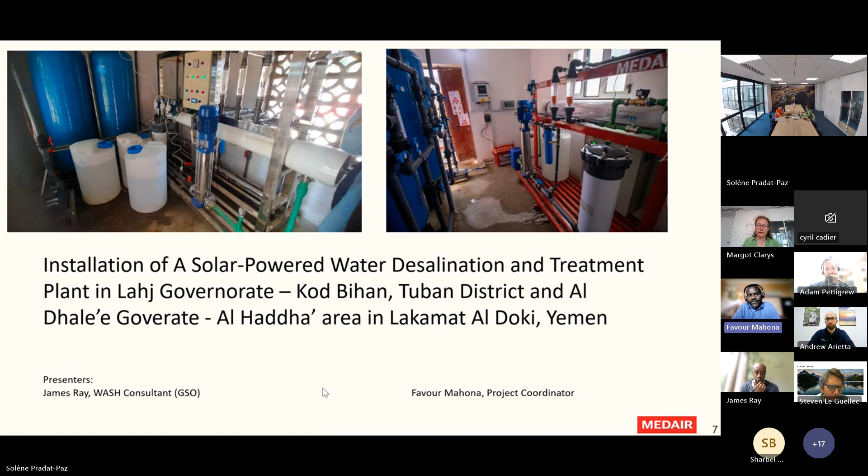So in Yemen, we actually did construct 2 desalination units. One, we did it in one governorate, which is close to Aden, which is Lahj. That is an area called Kod Bihan. And then another one, we did it in Al Dhale'e. And that's why you can see the 2 pictures. The first one on your left, that happens to be the one in Kod Bihan, and the one on your right would be in Al Dhale'e. Next slide.

Yeah, so among the technical things, just to give us a little background, what made us actually consider desalination was that we had a lot of high salts in the water that is available for the community to use, and considering the fact that we had lots of water sources, however they were not potable.

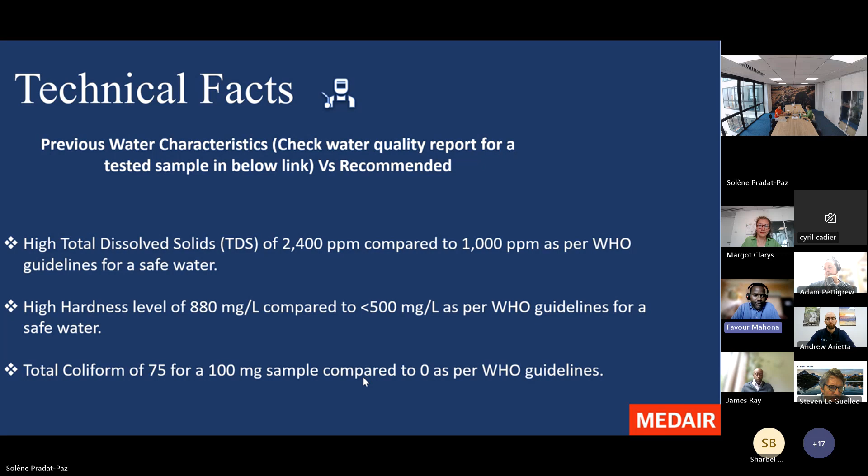And then largely before the war, we used to have piped water connecting the communities which are near the cities. But because of the destruction, people resorted to just finding shallow wells where there would be water, and then they would be able to access that water. So it was not very safe when it comes to humanitarian standards in terms of the total dissolved solids, the high water hardness, and the presence of coliform.

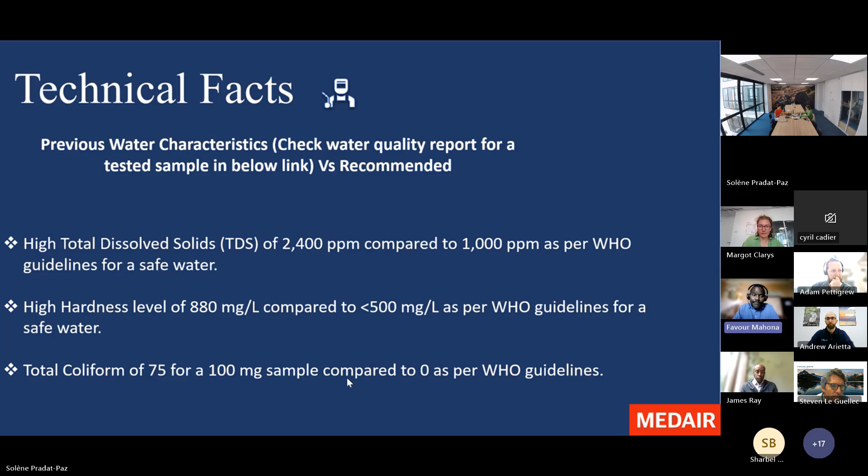So as a result, initially we would do a simple treatment method where we would try to source a well that would meet the standard, and then do a lot of construction and a lot of networking in terms of piping and all that. But that was going to be costly also in terms of sustainability.

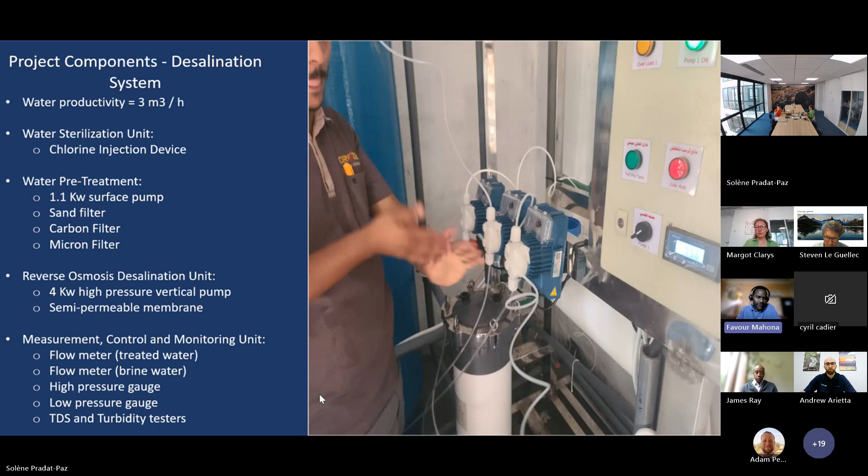Yeah, so why did we consider solar as an alternative energy to support desalination? Because we were looking at an energy mechanism that is available and also sustainable for the community. So solar came out to be the most probable successful one beyond the project, because alternatively, all their water points were always running on fuel, diesel or petrol run generators or pumps, and those were not sustainable, because when the community would not have the money to pay for it, the system would not function.

And we were thinking of making the desalination unit something that is sustainable even beyond our presence. We are now, I would say, about 9 months out of the country, but at least the units are still running. Kod has been functioning for the past 2 years. So at least we can use that as a success, that it's a plant that we were able to set up.

And among the things, maybe some of the differences that we're able to put between the one in Kod Bihan, which is in Lahj, and the one in Al Dhale'e, were the number of panels. In the beginning, we provided a reasonable number. We did not put so many of the panels, but then we realized later, because Al Dhale'e is a place where half of the year it actually rains, and then the other half is actually sunshine. But you come to Lahj, the better part of the year is actually sunny. So they have more sun presence, which then actually supports the solar energy.

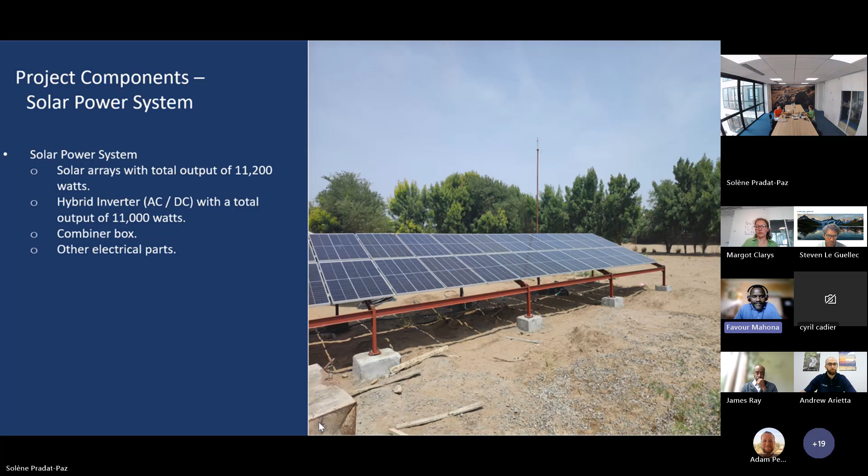And it's very easy. A lot of the community members were former retired engineers. So it was very easy to actually just do a brief induction, and then they'll be able to support the plant. Next slide. Yeah, you can skip that one. It's just something for information about the output.

Yeah, so I was just trying to think of something that maybe might be very good for us to consider. For example, the solution that we considered would actually be workable in a country like Yemen is the use of solar. So whether we are doing desalination, whether we are doing a water unit rehabilitation, we always considered solar energy, and that has worked, because most of our rehabilitated water points, either distribution of the water as well as the desalination, we worked with solar.

And what are some of the advantages that we have when we are using solar? For example, we have sustainability and availability. They have sunshine throughout the year, so that means they do not need to struggle to access the energy. And at the same time, the maintenance: once the system is functioning, all they have to do is clean the panels probably once a week, and then monitoring that the system is functioning.

And maybe a disadvantage would just be that we realized not all of them... Sorry. We realized that not many of their engineers would, for example, troubleshoot if there is a technical fault on the wiring. But how did we mitigate that? We had to pair the contractor who did the designing of these units together with the volunteers during the construction phase. Then they are taken through a refresher and orientation, and that supported us greatly. Next slide.

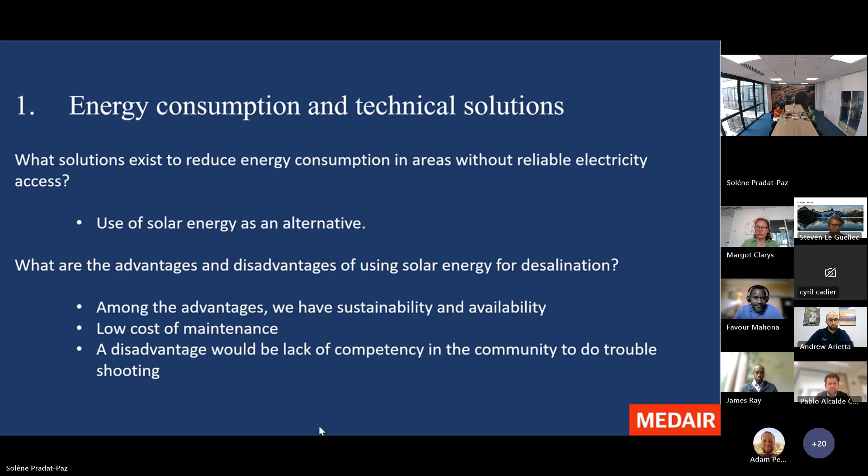Yeah, so I've mentioned the use of local expertise. One advantage we saw in Yemen is that in every family there was either a doctor or an engineer. So you'd always find in a village this one retired engineer who used to work in a factory or a plant. So these volunteers would offer themselves up to support. So we took them through training on how to operate the desalination unit in terms of changing the membranes, monitoring the gauges, and also servicing in case there is a fault on the electricals.

At the same time, we also connected them with contractors that had expertise in this. The two plants were designed by engineers in Yemen, and these engineers assembled everything from the beginning to the end. So we connected the local volunteers with the contractors to make maintenance easy, because there was a guarantee that we signed with them for 1 year beyond the project. So they would always come to do regular checks, maybe every 3 months, and during that time they're doing it together with the community.

And among the best practices we saw was that working with the retired engineers in the community provided a very good pool of personnel that could manage the unit, because the biggest challenge with a desalination plant is if you only import the engineer. Let's say we were working in the south of Yemen and you bring an engineer from Sana'a. Once he has constructed it and goes back to Sana'a, it means when there's a problem, that plant cannot be serviced.

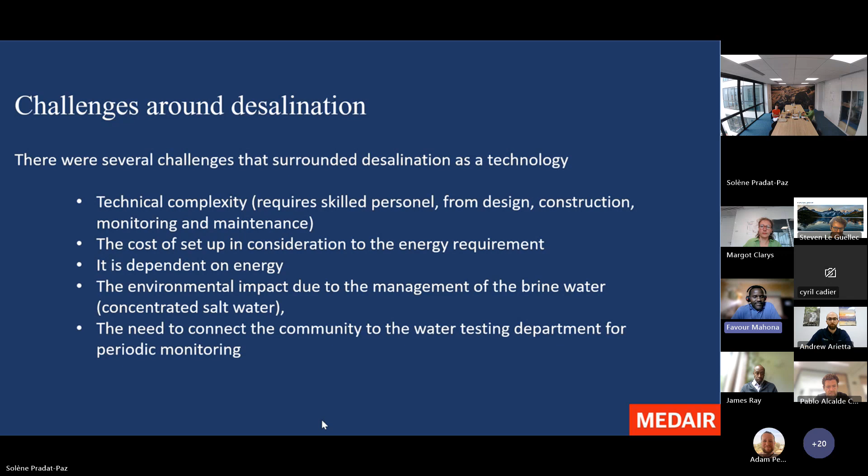On environmental impact, brine management was also a concern. What we did was make sure that for every bit of brine water, we had soakaway pits constructed away from the plant and away from where the population was living. And lastly, we connected them to the water department for regular testing of the water.

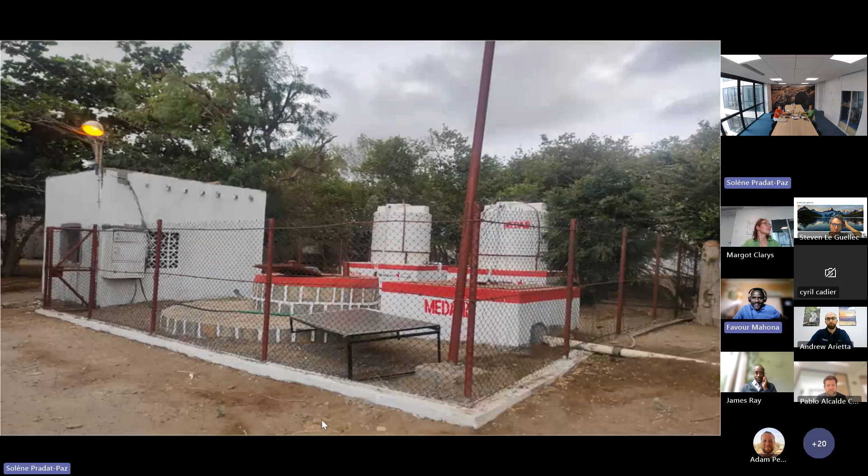Thank you. Thank you very much, Favour. You're welcome. James, do you have anything to add, or can we go ahead? No, I don't have anything to add. Thanks, Favour, you're amazing. You're welcome, thank you.

I remember back in January during the workshops there were lots of questions around the RO technique being necessary for it to function, since it needs so much energy. Even though we won't be able to lower the amount of energy it needs, how can we diversify the sources of energy so that we're not unable to put the technology in place if the source is no longer available? So hybridization was a big question in January—how we could use solar, but not only solar, because in certain places it's not possible, or at certain times of year we can't rely on it. So it's great to understand the different limitations and specific constraints in Yemen that you experienced.

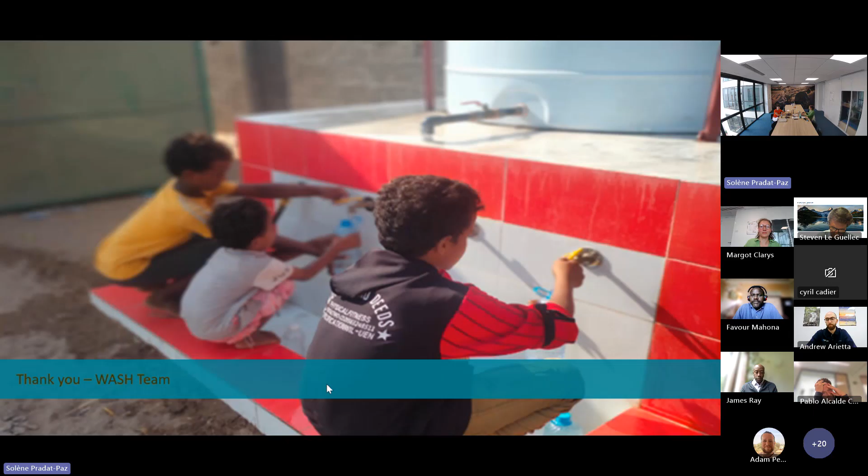I think that's a great transition for Maud to take the floor, and she will share with us the specificities of the Gaza context and how Solidarités could adapt the way they do desalination because of that context.

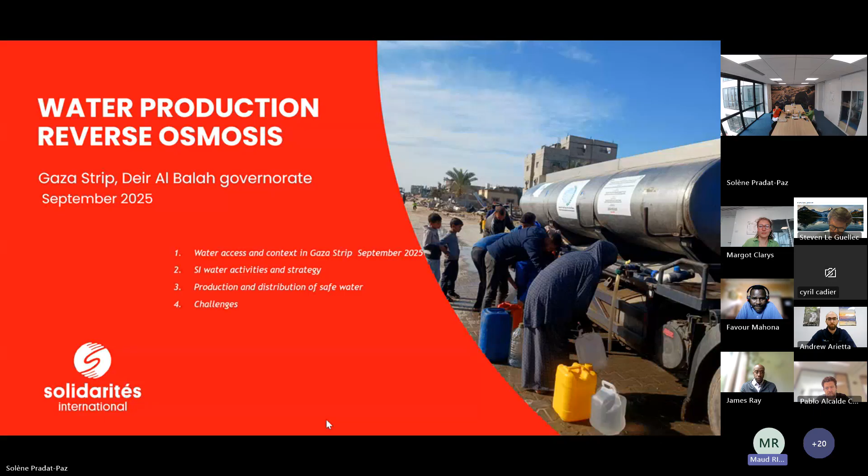Maud, thank you, up to you. Good afternoon, everyone. I will discuss with you water production through reverse osmosis in the Gaza Strip, mainly in an emergency context. Let's go.

I'll start with a bit of context, though I guess most of you already have an idea. Most of the population has been displaced multiple times, and since March 18th, there have been more or less 850,000 people displaced again. Also, as of last July, 96% of the population evaluated by the WASH cluster said they are facing moderate to high water insecurity, meaning they do not have access to water.

Water in Gaza means drinking and domestic—there are two kinds. This was already the case before the war: drinking water mainly for cooking and drinking, and more if possible, and domestic water for laundry, cleaning, showering, and so on.

Also, there was a big issue about water quality, mainly chlorination in Gaza. Last April, 85% of households were not consuming water with sufficient chlorine or FRC, so that gives you an idea.

Also consider that in Gaza there are a lot of what we call evacuation orders—you receive a message from the Israeli army saying this area has to evacuate. Following this, a lot of infrastructure becomes unreachable, or not safely reachable. There's a small table here, from September, showing the impact on WASH infrastructure in Gaza today—I won't go through it in detail.

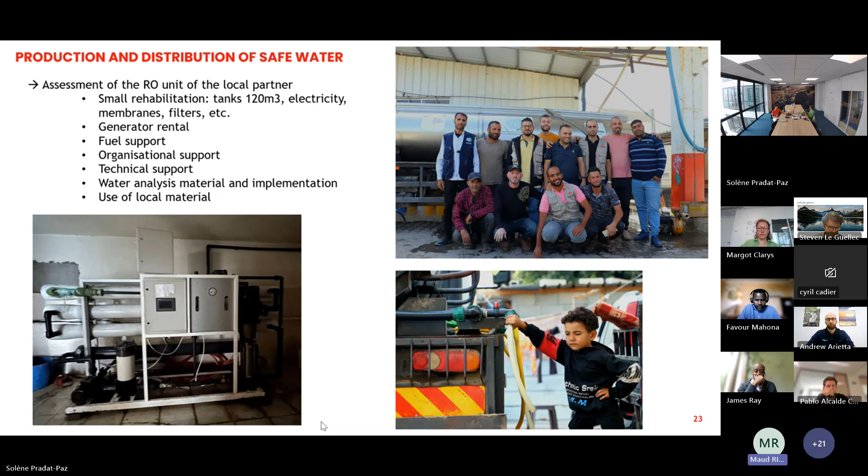Here you can see what I called the synopsis of the station. I'm very sorry about the pictures, they are not good, but that's what I managed to have. So the first one is the borehole, then the raw water storage, the RO, the chemicals and all what you need to make it run, then the drinking water storage and the filling station for the water trucks.

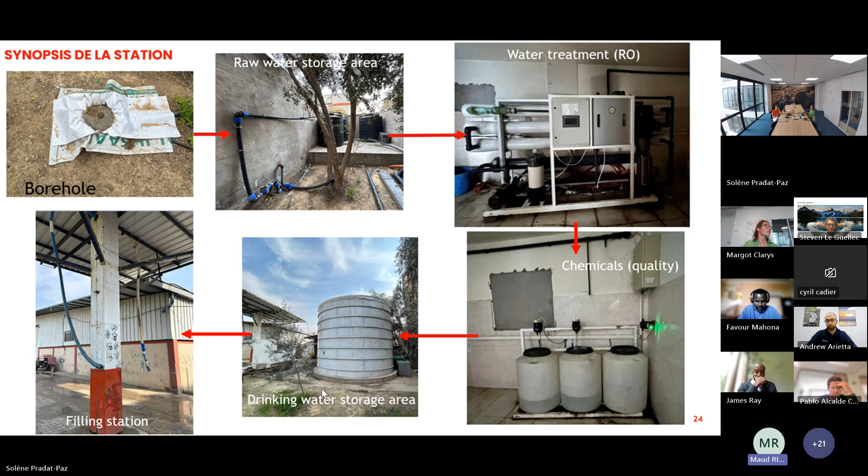Can go next. As Favour already explained, we had some limitations, some challenges.

The first challenge we are facing is the loss of yield and performance of the RO because it's very complicated to make normal and regular maintenance, to change the membrane and so on. We mostly try to keep it as much as possible and then change it only when really necessary. We also have issues with the energy, as you understood, and the quality of the consumables. For example, for a long time the antiscalant was almost only water, so it was very complicated to keep the membranes.

There is also a problem with chlorinated water among the community, which is another part. Security, and there is also a lot of population movement. So each time you put the truck somewhere or distribute water somewhere, you need to move your truck the day after. So that's the main challenges.

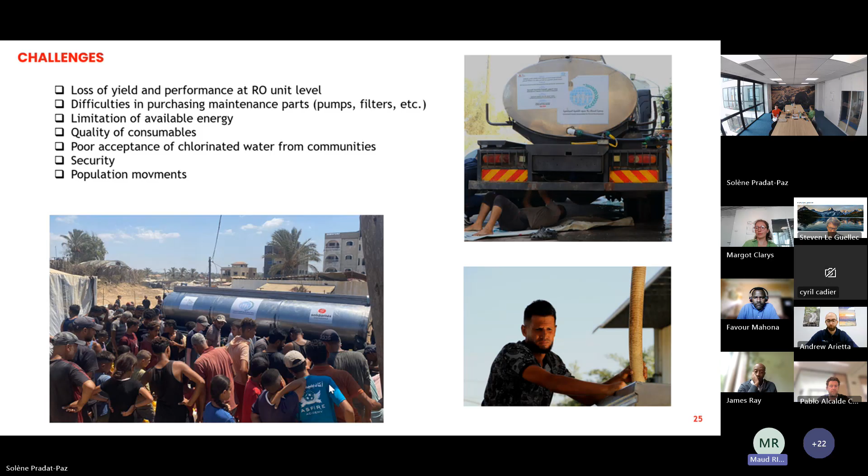And just on my side, I want to emphasize that we used and started this project in Gaza in emergency because it was existing before, because the partner had all the competencies and experience to do it, and we just reinforced and supported them with material they cannot access easily or afford. So that's really a big point for me, because reverse osmosis is not a technology you can easily implement in an emergency, or a new technology you can import. I think that's it on my side.

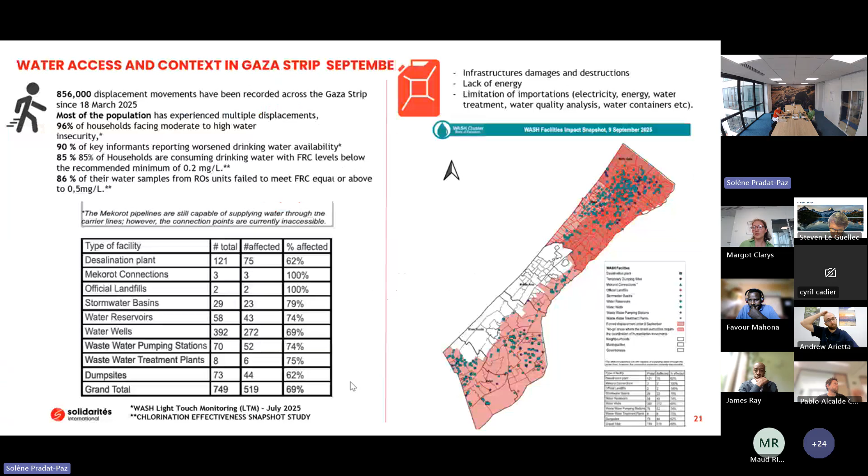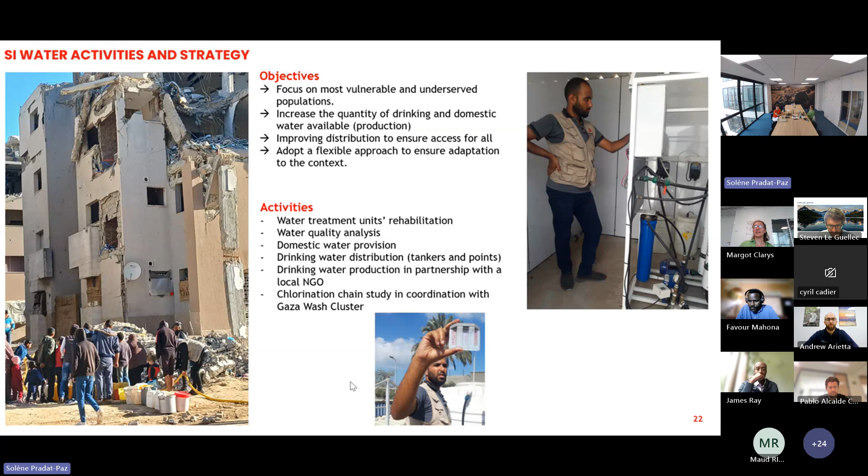Can you hear me? Maybe. Oh yes, yes, okay, I fixed it. So maybe Marielle, we can wait a couple of minutes more, then we'll go through Steven's presentation and start with that question. Thanks, Marielle.

Okay, so let's go back to reverse osmosis and especially reverse osmosis with energy recovery. Next one, please.

So reverse osmosis has been discussed previously in our other workshop and presented to have many advantages because it's pretty universal. You can use it on every kind of water, from fresh water to brackish and seawater. So it opens the supply even to seawater, which is pretty interesting. There is a lot, it's a big source. We can rely on local water, even though we don't know what the quality will be in emergency and disaster situations. So that's a pretty good point.

But I've heard a lot, and this has been said previously today again, that there are a lot of challenges. And those challenges are, first, a high energy consumption, especially in a context where the energy is not easily available. And second, pretty complicated and costly operation and maintenance. The third one is the environmental impact of the brine rejection. But as I mentioned, we are a manufacturer of equipment, so we are not really involved in the implementation of our equipment on the field, even if we are happy to support and provide solutions or paths, but we focus more on the product itself and the technology.

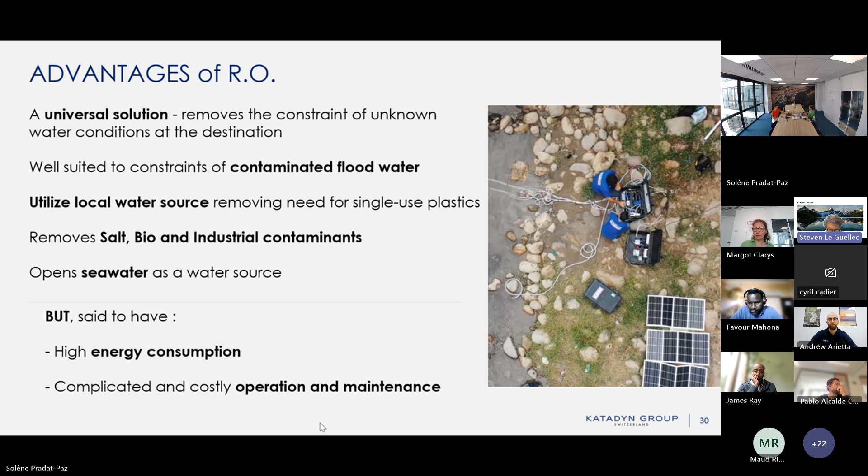And today I want to talk about how we can solve these two main challenges, which are high energy consumption and difficult operation and maintenance.

What is usually quite often used is kind of conventional reverse osmosis, which is available all over the world. There are a lot of systems like that, which is easy, simple, but a little bit basic. We, but other manufacturers as well, have developed a special kind of reverse osmosis which uses a proprietary pump. For us, we use a special one, which is the Pearson pump. I will talk about it.

You can see on the picture, we have another pump which is the Clark pump for smaller systems, but that's the same principle. So this pump is a high pressure pump which offers energy recovery, which means that the rejection pressure of the brine is re-injected in the circuit automatically by the pump itself.

Systems with this kind of pump are working with a fixed recovery rate, which means that whatever the features, the quality of the water at the input, we will have the same output of 50%.

These pumps and this system have been extensively tested and developed, and we have a lot of field, I mean it's a field-proven technology since 15 years or more. Even though it's pretty new in the WASH environment, we have been using these systems in the marine business, where people need low energy and are not really available to operate this kind of system on a daily basis. So we have adapted it to the WASH environment.

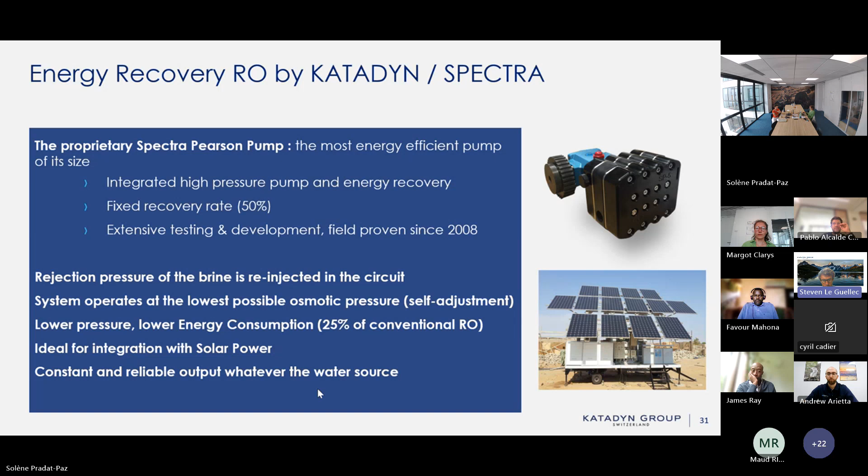The other consequences and good assets of this energy recovery and fixed recovery rate are the easy use and simple maintenance. Why? Our systems are basically simple start and stop operation. So you just start, you just stop.

We don't need any operators to fix the pressure of the system according to the different qualities of the water or the changing qualities. Nobody has to be here to analyze the water, to follow some abacus or some calculation to see what pressure needs to be used. The system itself will adjust mechanically.

So, which means that nobody needs to be here, and the system adjusts to the lowest osmotic pressure. So it maintains a low pressure on the membrane, and there is no risk of excessive high pressure and damaged membrane due to this over-pressurized situation. So it's pretty easy to use, no need of expert operator, and limited risk of breaking the system by wrong operation. The system is operating alone.

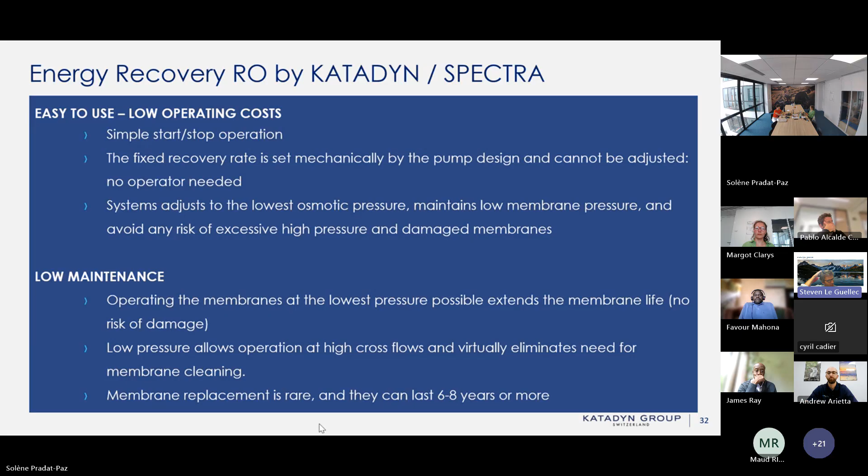So just to say that I wanted to present the technology that we are using that solves the two main challenges, at least the technical ones, that are usually faced in RO use. I just have to illustrate that. Next slide will show one of the systems that we are deploying in WASH situations.

So this one maybe we can take just 1 minute, Steven, to go over this, just to be conscious of time. Yeah, right? I will. Like this morning, I do it very quickly.

Just want to show that this equipment is the more mobile and small. So just to say, we are doing 16 cubic meters per day with that at a TDS of 32,000, which is really seawater. 50% fixed recovery rate, as we say. So 1 liter in, half a liter out. And if we look at energy efficiency, it works with 2.6 kilowatts on seawater, which means 3.9 kilowatt hours per cubic meter.

And to do a small comparison, because it can be easily used with a small generator of 3.5 kilowatts, usually with 1 liter of gas oil, oh, I see it's in French, sorry. With 1 liter of diesel fuel, we can produce 1 cubic meter of fresh water. And this is a basic equipment which can be fixed with daily tools, nothing special. It's pretty easy to assemble and pretty easy to carry. We have systems going up to 75 cubic meters per day. These ones are more fixed in containers, for instance, but they work with the same technology. Here we are.

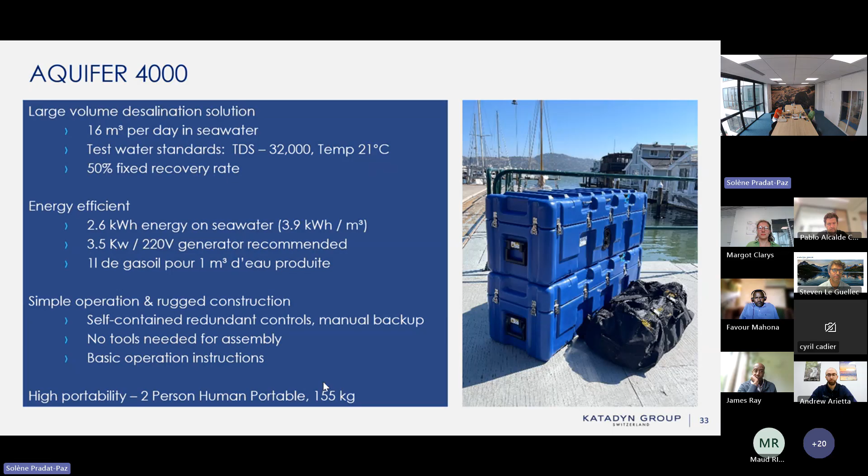Perfect. Thank you very much, Steven, for telling us about the technology. And if you have more technical questions, I have Andrew with me, who is really the technical guy of Katadyn Desalination. He's here and available if you have a more complicated question that I couldn't solve.